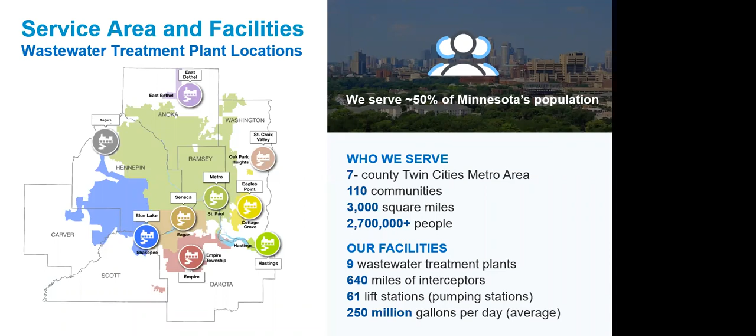We're often asked at public meetings, how does MCES finance our projects? The way we do that is we charge sewer user fees to the individual cities and townships that are our customers, and then within the cities and townships, the residents are their customers. So we don't use tax dollars, we don't levy assessments, because our projects tend to benefit larger areas that involve multiple communities. Our projects are paid for with regional dollars.

Next slide, please. So next, I'd like to go over some terms you'll hear during the presentation tonight. I already talked about who MCES is, that we are an operating division of the larger organization called the Metropolitan Council. Similar to how Metro Transit operates the bus system, we operate the regional wastewater system.

This regional wastewater system is basically 640 miles of underground pipes that carry the wastewater, or sewage as it's also referred to, away from homes and buildings that the city systems collect. Each city has its own local system, and we are the receiving system for the city systems. We call our sewers interceptor sewers, and that's just a way of differentiating a local system from a regional system.

Lift stations are basically just pump stations that assist with the movement of the wastewater. If the wastewater is flowing by gravity through a gravity pipe and gets down to a low spot in the topography, we will oftentimes have a pump station that will pump that water up and over a hill or some other obstacle that flow by gravity cannot get past. Because the flow is being pumped or forced through those pipes, we call the pipes force mains downstream, immediately downstream of our lift stations.

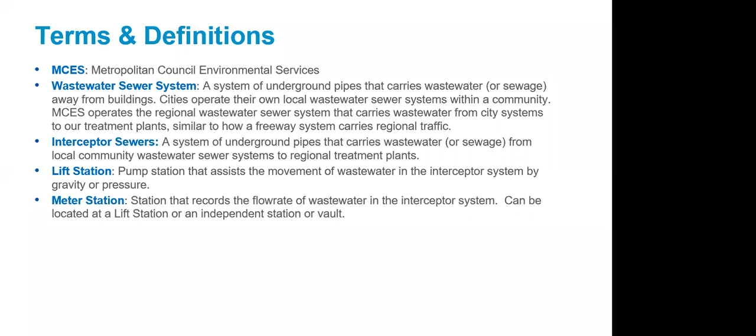The work will be split up and sequenced from street to street, so the entire length of the project is not going to be torn up for those two years. The work will sequence its way from one end to the other, so we can minimize unnecessary disruption that way.

Next slide, please. The map on the right shows the locations of where the work will be occurring for the project. In short, the project consists of installing a new gravity sewer pipe between two of our lift stations, and this will allow us to remove an old obsolete lift station, L20, shown in the lower right in green there. Then the flow that normally goes to that lift station will flow through this new gravity pipe to lift station L19, which is in the upper left corner of that map.

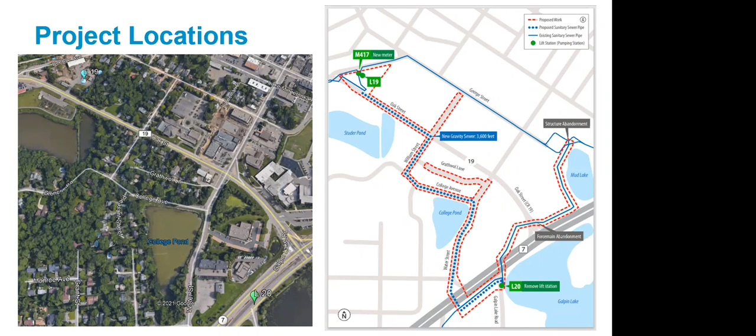Next slide, please. So I'm now going to turn it over to my colleague, Tom Melody, who is the design engineer for the project, and he will talk about the different construction phases for the project.

Yeah, thanks, Dan. This is Tom Melody from Stantec.

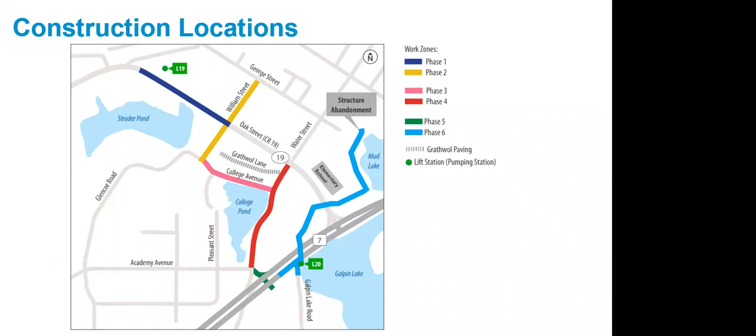The project is broken into 6 phases, shown on this plan. Each phase will have several passes through the roadway: roadway removal, bituminous removal, then installation of deep sanitary sewer, water main, and storm sewer, followed by roadway grade and pavement, new curb and gutter, new sidewalk, and finally grass seed and sod.

Can you go to the next slide? Excuse me, hold on, wait a second.

The construction impacts we see are, except for Oak Street: access in and out of driveways will be restricted from 7:30 to 7 p.m. while work occurs in this area. The contractor will install temporary mailboxes for mail delivery, and will coordinate with residents on garbage bin pickup for the garbage haulers. If you have any specific access needs, like metro mobility, or you have a business or work the second shift, let us know and we can work on getting on-street parking areas and coordinate with the contractor.

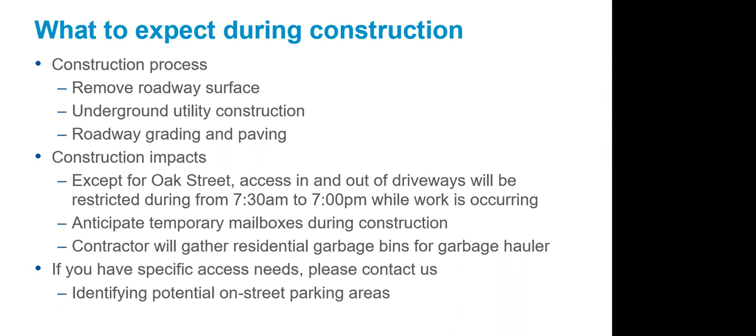This is phase one, Oak Street. We'll be installing sanitary sewer down the middle of the road, with 1 lane of traffic on each side. When we get to the intersection of William and Oak, that'll be nighttime work, and we'll maintain 1 lane of traffic during that phase. The nighttime work will be from 7 p.m. to 7:30.

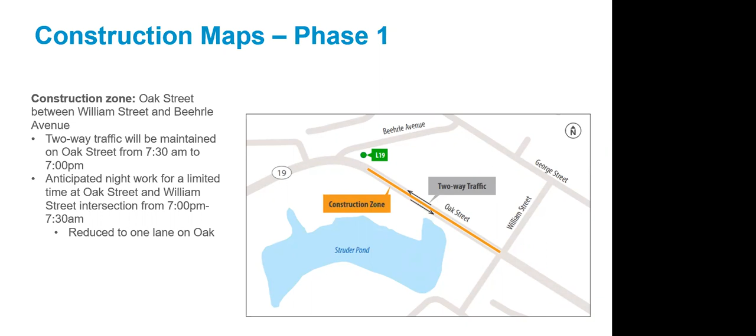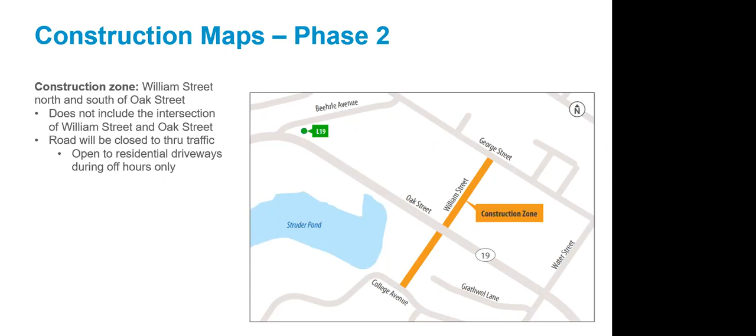Next slide. Phase 2 is William Street from George to Oak, and then also from Oak to College. This is also street reconstruction and utility work in this area.

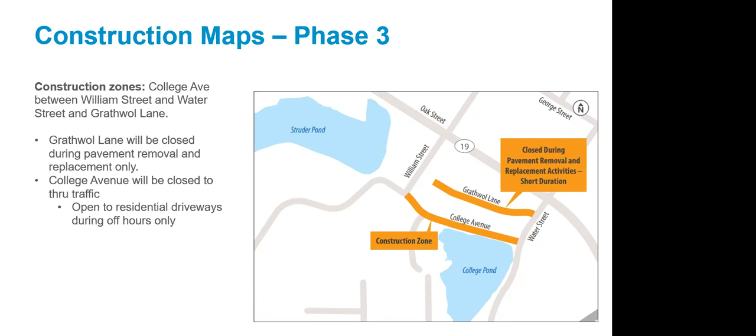Phase 3 is College Avenue from William to Water. We'll be installing utilities and reconstructing the road, and also Grathwol Lane, which will be doing street reconstruction. Doing Grathwol Lane, we'll have to coordinate with the residents to gain access to their driveways. We'll work with the contractor on that part.

Next. Phase 4 is Water Street from Oak to Academy. This is utility work and street reconstruction.

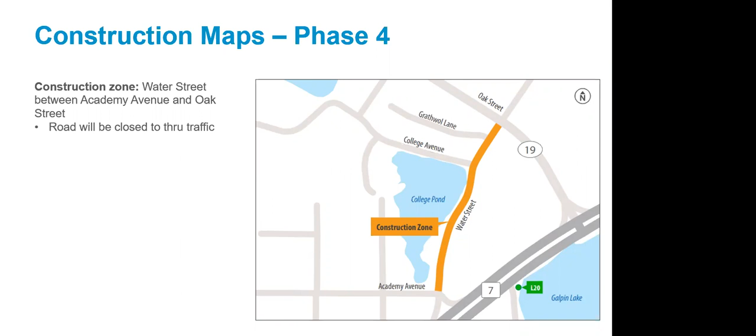Phase 5 is when we tunnel underneath Highway 7, we'll close the ramps from Highway 7 to Water Street, and install the Met Council interceptor underneath Highway 7. This will be tunnel work.

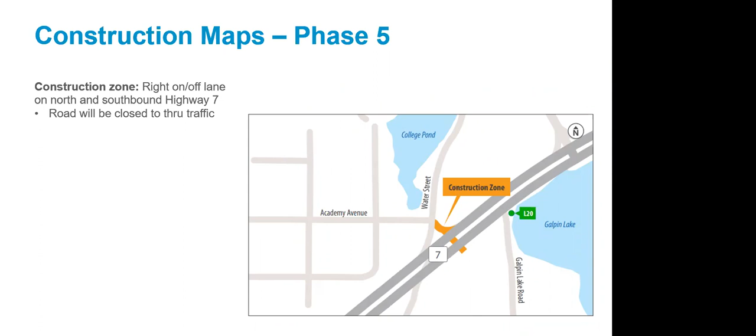Phase 6 is along the south side of Highway 7 to Galpin Lake Road, where we'll be installing the interceptor. Galpin Lake Road will be closed at the intersection of Highway 7, and the right turn lane will be closed at Highway 7. We'll also be working on abandonment of the underground force main that goes to the back of Excelsior Elementary School.

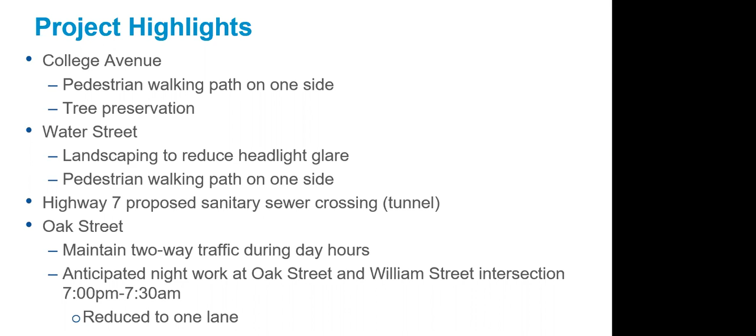Project highlights: On College Avenue, we'll be installing the bituminous pedestrian walking path along College Pond, and preserving the oak trees on the north side of College Avenue. On Water Street, we continue the pedestrian path from College Avenue along College Pond, and install some trees to block headlight glare from driveways facing Pleasant Street across College Pond. Highway 7 is the tunnel we talked about. On Oak Street, we'll maintain two-way traffic during day hours, and the anticipated nighttime work at William Street and Oak Street will be from 7 p.m. to 7:30 a.m., with just one lane of traffic.

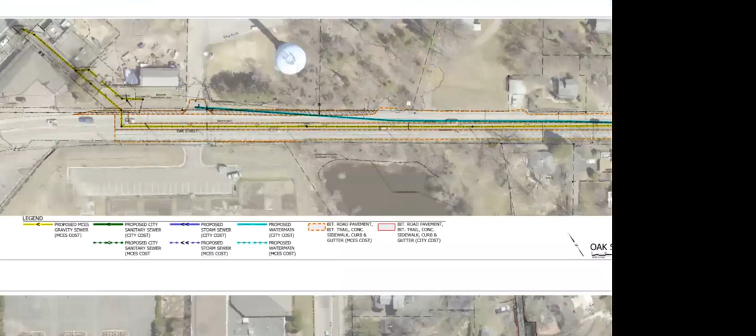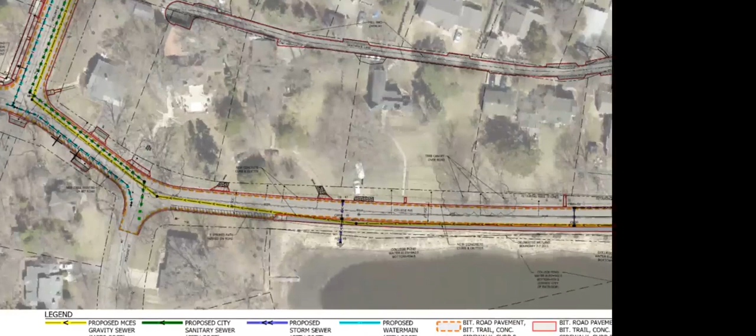Next slide. This is College Avenue from Glencoe all the way to Water Street. You'll see sanitary sewer, some water main, some storm sewer, and the bituminous path on the south side of College Avenue along College Pond, that gray shaded area. And if you look up top, you'll see Grathwol Lane, where the red outline is a new bituminous reconstruction.

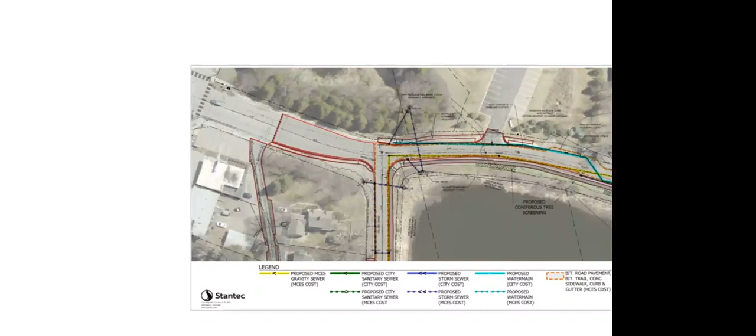Now we look at Water Street from Oak to Academy. You'll see street reconstruction, new sanitary sewers, some new water main, and redoing the storm sewer.

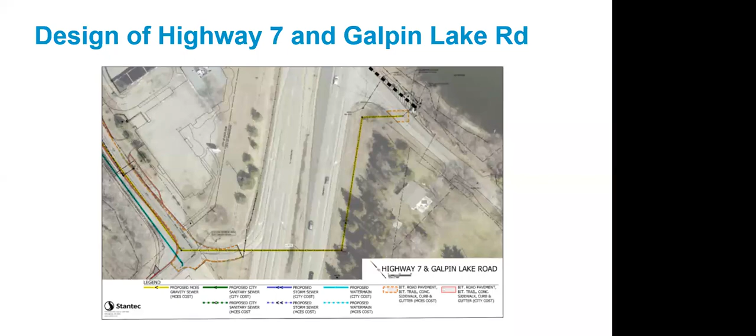Next slide shows the crossing of Highway 7. This will be a tunnel, no open cut across Highway 7. And we'll reconstruct the ramps to Water Street from Highway 7.

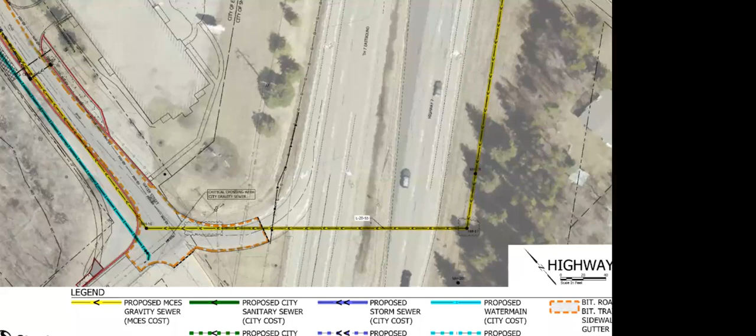And then we go all the way up to Galpin Lake Road with the new Met Council interceptor. That black dash is where the L20 lift station is, which will remain in place.

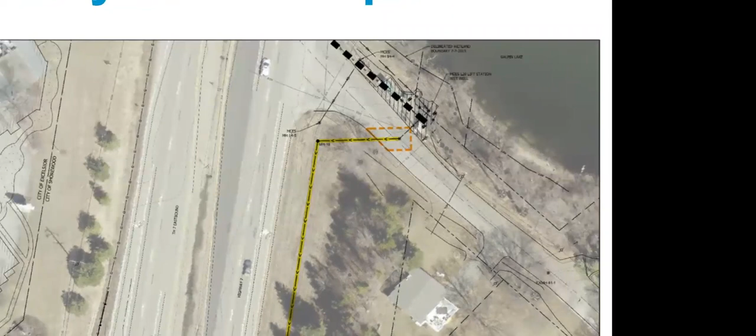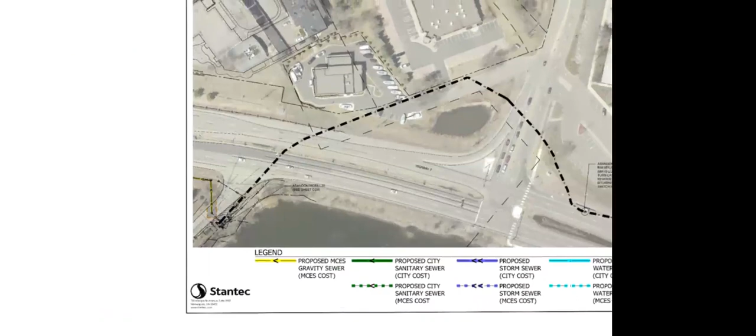The next slide shows the dark dashed line is the existing force main that will be abandoned underground, filled with flowable fill. And that's a picture of the Excelsior Elementary School in the background.

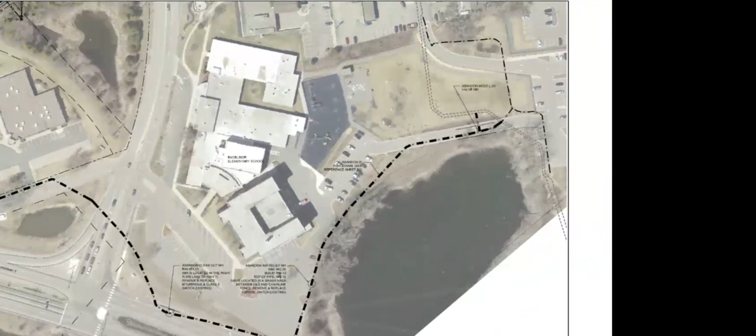Thanks, Tom. So as shown on the schedule, you can see the next steps here. We'll be bidding the project in the fall, so you won't hear too much about it until sometime early in 2022.

Once we have a contractor who's been awarded the project, we will send out another mailing and reconnect with the area around the project, let them know construction is happening, and then go through construction over the next two years, as Tom illustrated in his slides.

We show it being finished in 2024, but what that allows for is usually turf restoration, making sure all the grass is alive and things like that.

So in 2024, we're not anticipating a lot of construction work that would impact the neighborhood. Really, it's more giving us flexibility should the weather be adverse to construction, and also allows us to make sure the turf is well established before we let the contractor off the job, so everyone's yards look the way they should.

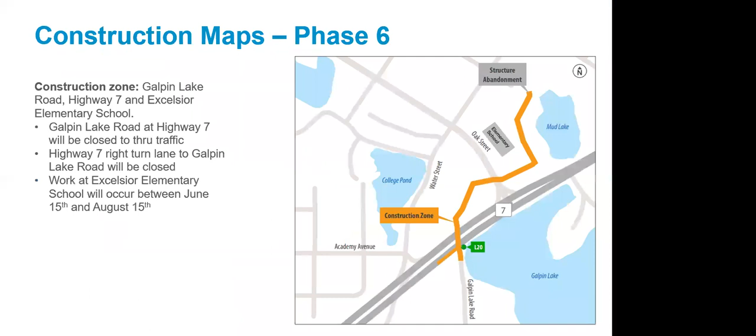Dan or Tom? I can answer that question. This is Dan. So can we flip to the slide that shows that part of the project? Okay, in the right-hand portion, if you can pan up a little bit so we can see the upper one. There we go. So to the right of this upper map, you can see the portion of William Street that the person asking the question is talking about.

The blue line indicates that there will be some water main work, and the purple line indicates there will be some storm sewer work. So the answer is yes, it'll be more than just pavement. We will also be doing some utility work in William Street between Oak and George there.

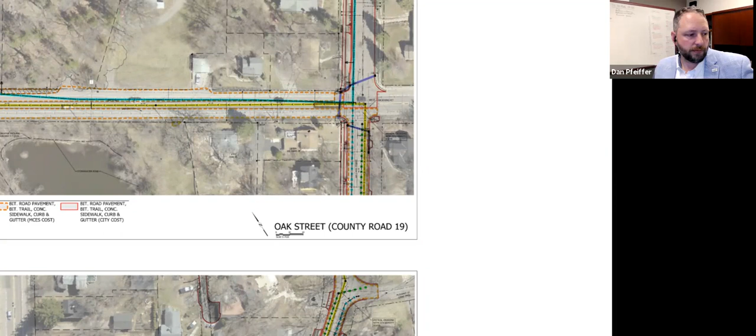So the next question is, when do you anticipate beginning construction in 2022? Do we have a time frame? It sometimes depends upon how the bidding process goes and how long it takes to get the contracts signed and things like that.

But typically what happens is there's a lot of work that's difficult to do while the ground is still frozen, so work will begin in earnest when the frost restrictions are off the roads, and that's usually about the same time the ice comes off the lake, so that's probably in April. There may be some mobilization and other minor work going on in maybe February or March. It's hard to guess at this point, but it's possible you may see some activity during those earlier months of 2022.

Thank you. Will College Avenue be narrower due to the new walking path?

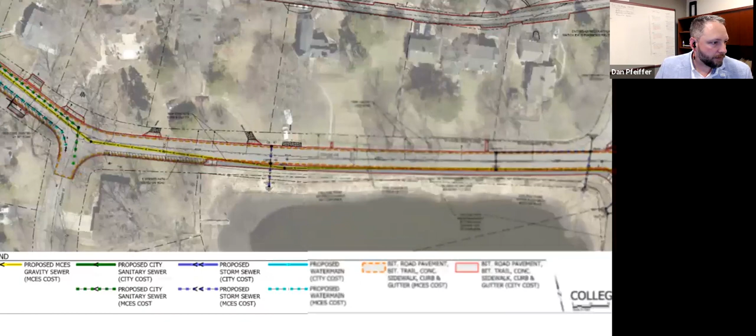Tom, would you like to talk a little bit more about what the design changes and widths are on College Avenue? Right, the existing driving surface will be narrower. Right now we plan on having the new bituminous path, the back of it match the existing pavement. So that'll be a 5-foot wide bituminous path, and we have curb and gutter.

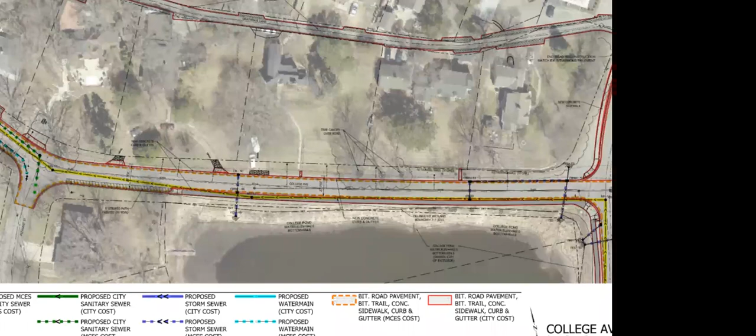And then we have the roadway section. Let me find out the width of that for you, just a second. Dan, if you can zoom in a little, I believe there are some dimensions on the drawing that may show the width of the pavement. I don't know if we can zoom in and make that any bigger or not. So from the new gutter to gutter curb, it'll be 20 feet wide.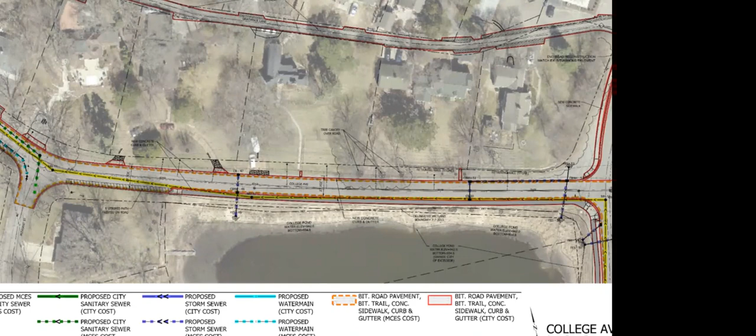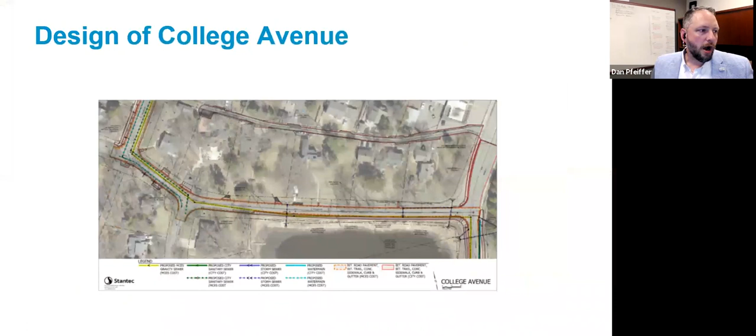So the next question is, where will parking for residents who need to get in and out from their homes and driveways on Williams south of Oak be? Tom or Dan? So it's Williams south of Oak, so that'll be the bottom view down there. So this will be during construction.

Correct. Williams will be under construction and College will still be open. So probably the locations for parking will be on Glencoe if they can't get access to their driveways. But the goal is to have access to driveways after each workday, so the resident can get back into their home. That's the goal of the project, to coordinate with the contractor for that to happen.

A lot of work will go around with working with the contractor to identify those locations and putting that out in communications to the residents before construction starts on that roadway. So that's why we encourage everyone to sign up to receive updates, to submit questions, send questions to the email. So we get your email address.

So we have that so that we can reach out and schedule those and ensure parking is available if you normally leave your house before work starts at the beginning of the day and are back before the end of the construction workday occurs.

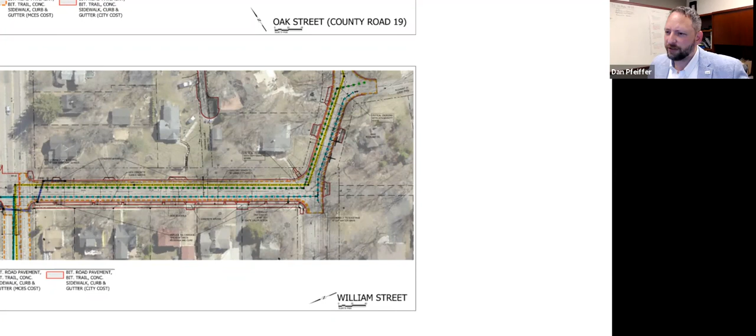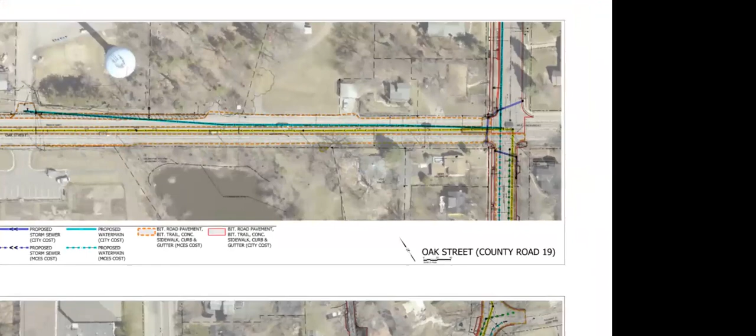Next question is, our water and sewer in William are quite old. I'm not sure you succinctly described replacement of them. Could you go to the William Street on the north side between George and Oak? No, it's the bottom view to the left. Pan over to the left. Yep, that's it right there.

So between George and Oak on William, we're going to replace the water main by pipe bursting it. And then the existing sanitary sewer line will be lined. And then there'll be just new storm sewer at that purple there at the intersection near Oak Street. That purple will be the new storm sewer that will be replaced.

On this part of William Street, we plan to keep the north curb line, the west curb line, and the sidewalk that's along the church. That'll stay in place, but the sidewalk on the east, on the bottom side, will be replaced. We'll try to match the existing back of sidewalk, and they'll have new curb and gutter on that side also.

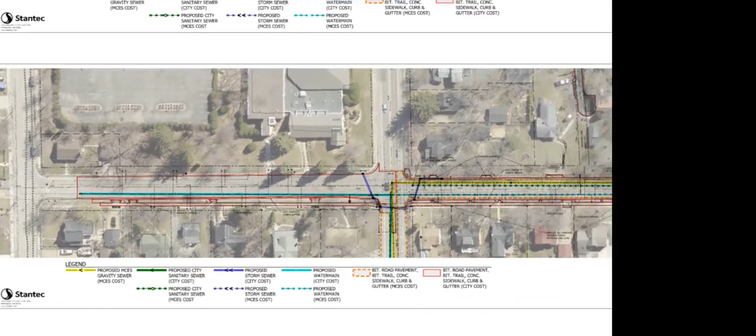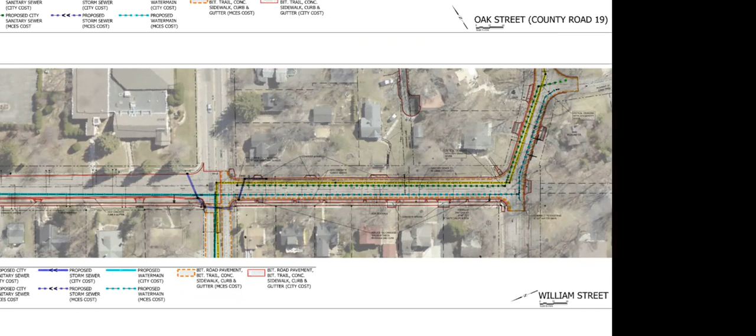On William Street between Oak and College, we'll be putting new water main in and new city sanitary sewer. And then also some new storm sewer at the intersection of William and Oak, that in purple there. And this street reconstruction will have new curb and gutter on both sides, and then new sidewalk on the bottom side, replacing that sidewalk.

Morgan, is there anything you would like to add to Tom's description? Thanks, Dan. No, I think he described that accurately.

Hopefully that was okay for Mr. Finch, but I certainly would encourage, if Mr. Finch or anyone else wants more detail in terms of city utilities, either existing or the condition of them, or some of the thought process that went into coordinating with the Met Council's engineers in terms of collaborating and trying to determine what are the right city improvements to include in the project at this time, certainly you can get in touch with me through the project hotline or through City Hall. Either way, I'd be happy to meet one-on-one, either myself or again with Tim from Public Works, who's in attendance here as well too. But I think Tom did describe it accurately.

That's the intent and approach. We're trying to save what we can that does have some life left in it, rather than just replacing it unnecessarily too early.

But certainly there are some aging infrastructure issues on both sides of William there, and we're trying to pick them up and take care of them as best we can while Met Council will be in the area. This is an opportunity to take advantage of some economies of scale, rather than the city doing a smaller project on its own that might be more expensive on a per unit basis. There's a lot of value in these collaborative efforts, with the city being a partner with what the Met Council is already planning to do for their facilities. So that's all I'd have to add.

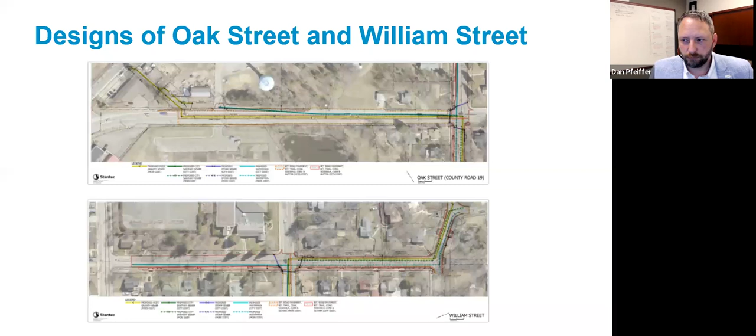This is Dan again. Typically when water main is replaced, there will be periods of service outage when the water service is connected to the new water main. Before we interrupt water or sewer service, we'll let residents know ahead of time, and we try to limit the amount of time that outage takes place. If we have a long-term outage for major water main work, we would arrange to have a temporary water system installed, so a person wouldn't have to go a day or longer without water. We would ensure they had water at least by the end of the day, and try to minimize the length of time their water service would be stopped.

Thank you. What is the expected width of Water Street? Also, could you please explain planned loading zone updates to Water's Edge?

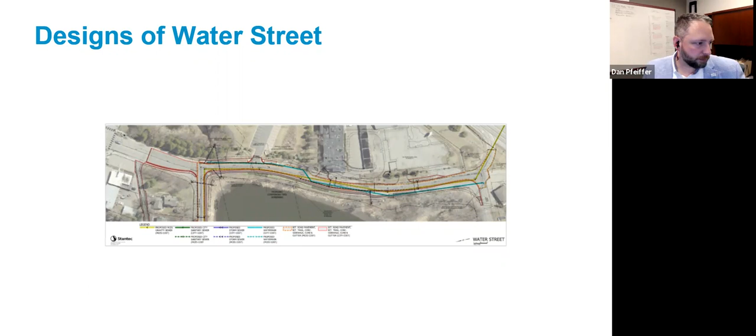Tom, would you like to speak to that? Yep, let me- so the width of Water Street, can you pan to the left a little bit, Dan? So from Water Street at Oak, we're not changing. We're doing a mill and overlay in that area, near Grothall Lane to Oak. And then in the red area, we're going to narrow down Water Street to College. And then from College to Academy, the width of the street is going to be 22 feet to the face of curb.

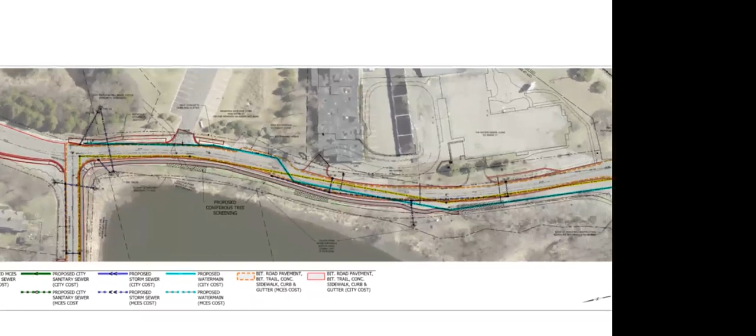And then if you can zoom in on the water's edge- yeah, zoom in on the water's edge. Keep going to the right. That red area, that's where we have a truck loading area going to be installed as part of this project. We've worked with Morgan on this, and we've also talked to the Water's Edge Senior Living Facility about this. So this is where they'll pull off with their trucks to unload items, so they won't be parking on the street. That's where the new loading area will be for Water's Edge.

Thank you, Tom. Next question is for Morgan. How much will residents on William Street be assessed for this project?

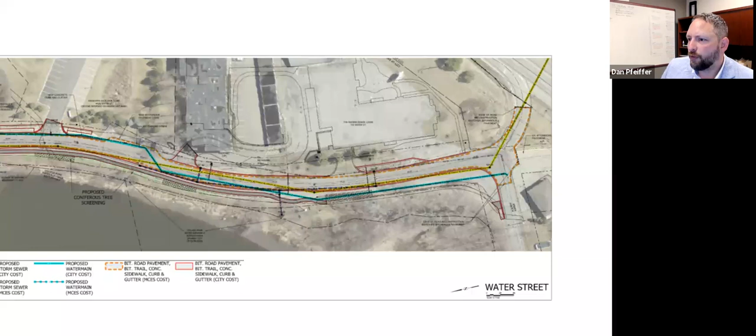Sure, thanks, Dan. That's a really good question, and we anticipated this was going to come up. That is more of a city thing rather than a Met Council thing. The city does have an assessment policy anytime streets are either reconstructed or rehabilitated, adjacent to private property that per the policy are benefiting from those improvements. There's some nuances to that policy, but it has generally been in place with some minor modifications since about 2010, and all of the projects residents have seen since that time have had some version of special assessments to benefiting properties that might be along or adjacent to the improved roadway.

Right now I can't give an answer in terms of what exactly the anticipated assessment might be for each property. That will have to be determined this summer with more in-depth work by the city, now that the Met Council has finalized the design and approach and is preparing cost estimates, just as we did with past collaborative projects with the Met Council and Excelsior. We will use that information to do some calculations and present preliminary assessment numbers later in the summer. That will be made public, with separate engagement efforts hosted by the city, not necessarily with the Met Council in attendance, for further conversations around special assessments for properties that benefit from a reconstructed roadway.

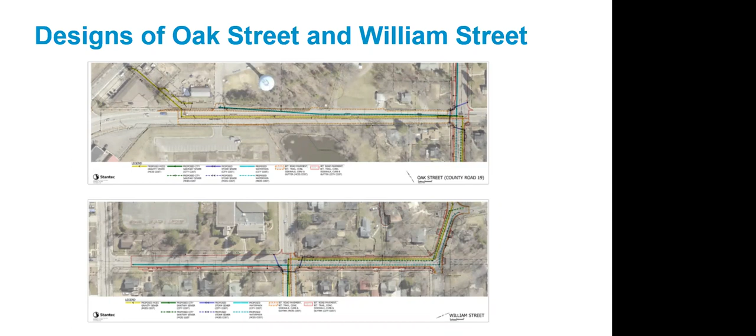I guess I don't have an average number for you, but if anyone wants to reach out after the meeting, I can look at a few past projects to get a general sense of what it might be. But we will have more specific, although preliminary, information for each individual property that might be affected by the assessment policy later this summer.

There will be separate engagement or open house opportunities for residents to learn more about that, probably by invite only for the properties proposed to be assessed. For this meeting, the Met Council has cast a wider net to include more people, but the city's preliminary assessment numbers later this summer will be specific to the properties affected, so a smaller subset of those invited to this meeting.

If you have questions specific about whether your property qualifies per the policy, or will you be assessed, or what we think preliminarily just for planning purposes, those are all totally legitimate questions you can and should ask at this time. You shouldn't have to wait. I may not have the exact number, but I can probably get close.

I certainly encourage those questions either through the Met Council - they can get those questions to me - or I have contact information to get back to you with, either phone number or email address. But otherwise, that's what I can tell you right now.

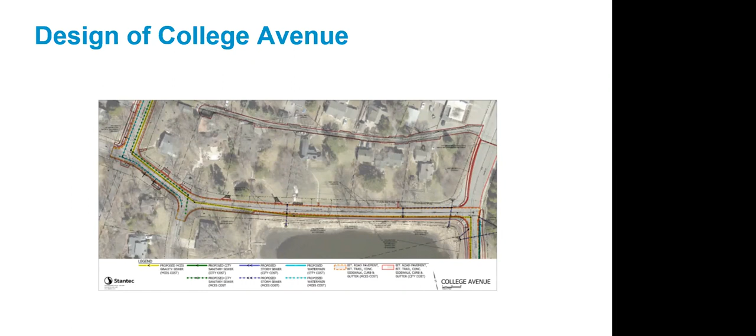15%, again compared to other cities, is a pretty reasonable calculation for a new road. Just to put it in context, not knowing exact numbers, we see some of the assessment numbers for single family properties for road reconstruction in town being, in some instances, less than it costs to put in a brand new residential driveway. So it's a fairly reasonable policy in terms of the calculation, but more to come on that.

If you want specific information about whether you will be assessed or might not be for whatever reason, or sometimes people are wondering about corner lots, just reach out to me separately, either through the Met Council or individually through City Hall, and I'd be happy to help you.

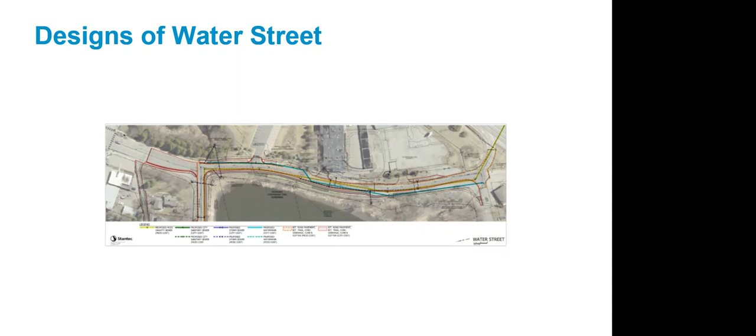So I have no more pending questions in the Q&A function. Wondering if anyone else has any - if any of the other attendees will do kind of a final call for questions. If not, any of the panelists have anything else they would like to add that the attendees might benefit from?